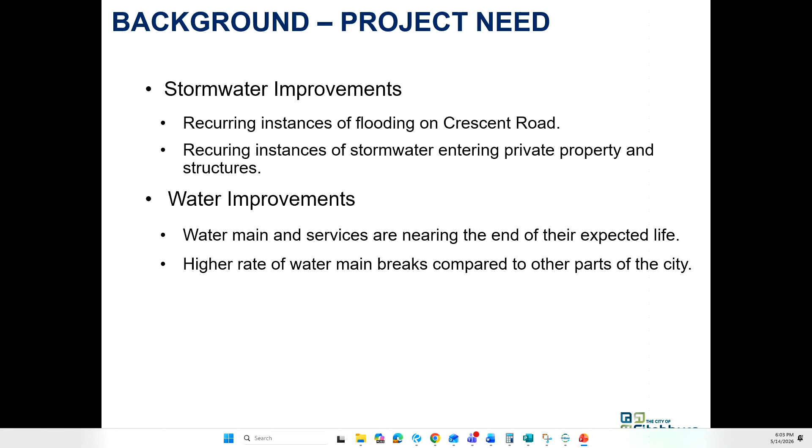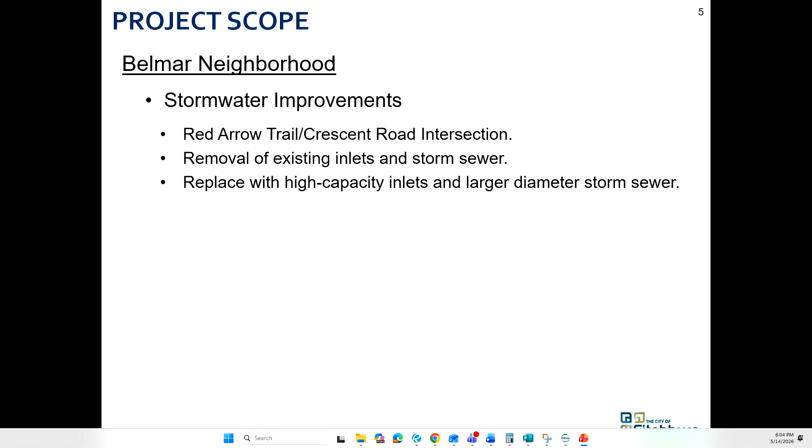Okay, so jumping into the scope again. With the stormwater improvements specifically, this is going to be at the Red Arrow Trail and Crescent Road intersection. They're essentially just going to be removing some existing inlets and storm sewer, and then putting in bigger inlets and bigger storm sewer. It's really pretty much as simple as that -- increasing the capacity and how much water the infrastructure can take. And then here's just a little map.

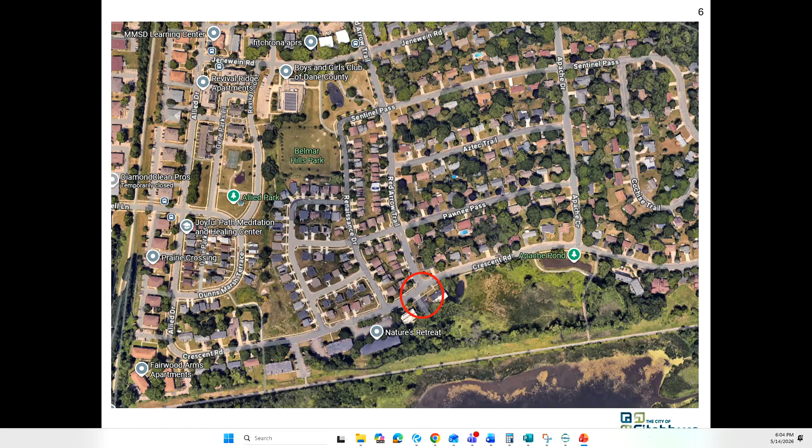I don't know if everyone can see that red circle on there -- that's basically the project area for the storm sewer portion, so it's largely contained in that Red Arrow Crescent Road intersection. And then here's just a snip of one of the plan sheets. We can talk about this a little bit more in detail if people are interested, but this is basically showing the new pipes that are going in -- again, larger pipes, larger inlets, can handle more water.

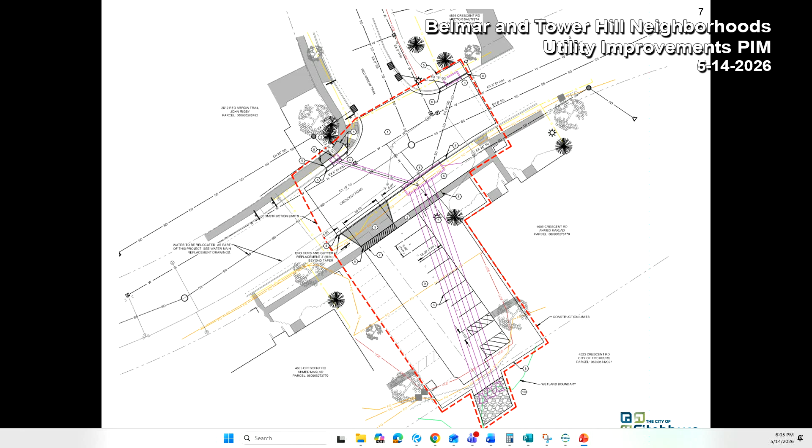So now we'll move on to the water main and water service replacements in the Belmar neighborhood. Do we have any Belmar neighborhood residents? Sentinel Pass? Or are we all Tower Hill here? All Tower Hill, all right.

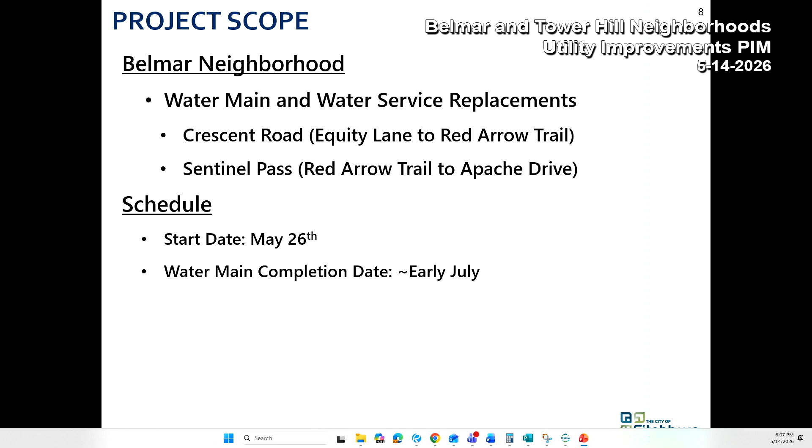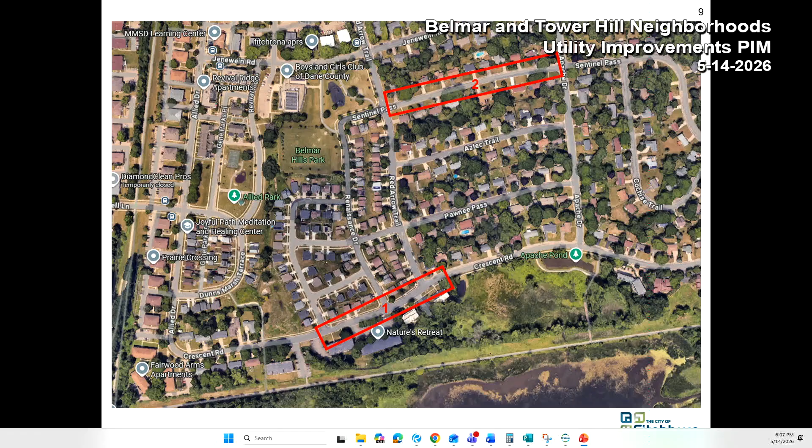So of course they're going to have to dig up the terrace area between the sidewalk and curb and gutter to install the service, so they'll have to restore grass there. Some folks might have a water service that goes under their driveway - if that's the case, then part of the driveway has to get removed and replaced. We'll talk more about that too in resident impacts.

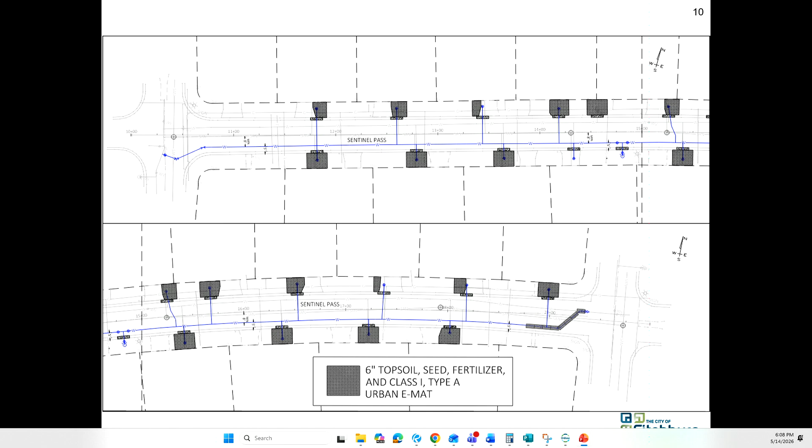And I'll just kind of flip through these, but does everyone kind of get the idea of what the water main portion is? Basically, just putting in the new one and new services.

We can move on to Tower Hill now. Same deal as what we just talked about at Crescent Road and Sentinel Pass - it's the exact same project, putting in new water main, new water services.

So as far as the schedule here, basically once they wrap up the work on Sentinel and Crescent in that kind of area of Fitchburg, they'll start to come down into the Tower Hill neighborhood shortly after. So we're looking at a late June start date for this area right now. It could start earlier if different crews become available.

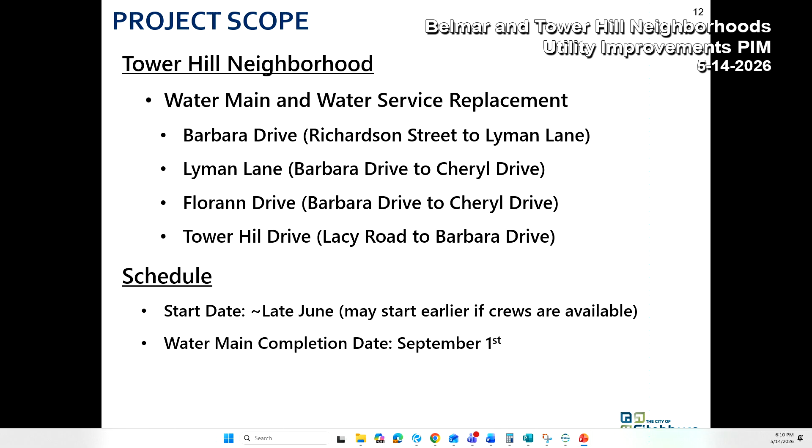And again, here's just the kind of red boxes around the streets that are getting the new water main and water services. So as I said before - Barbara, Florann, Lyman, and Tower Hill here.

On this map, you'll see numbers, and right now the contractor's intention is to install it based on those numbers. So where you see 3, that's where they plan to start first in the Tower Hill neighborhood, then go to 4, 5, then 6.

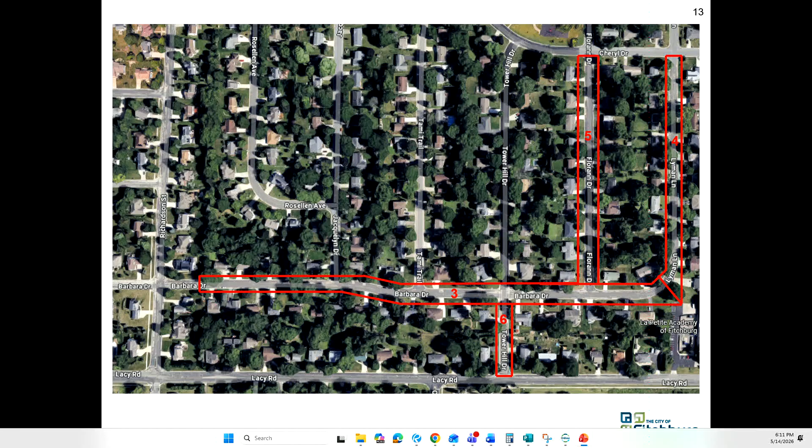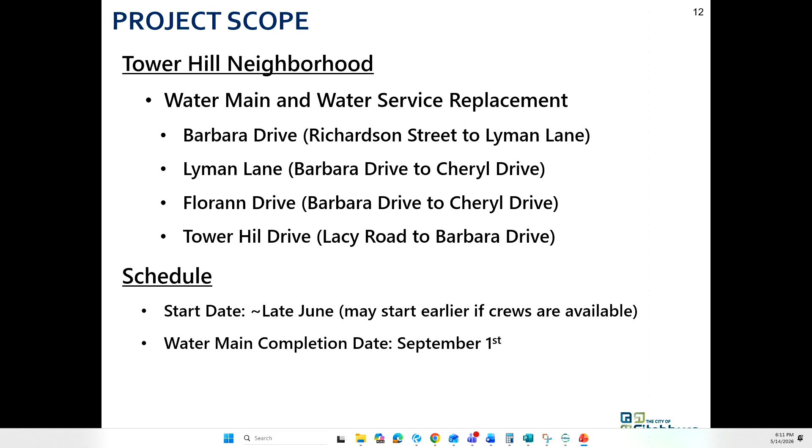Right, and I think it is in the same order. So yeah, what they're thinking now is starting on Barbara, then Lyman, then Florann, and then Tower Hill. That is subject to change to some degree, but that's the plan as it is right now. You know which way on Barbara, or is it all at once? No, based on the plans, because he said he was going to go through the plans from beginning to end, it's the west end, but that too could change. But it most likely will be the west end because we're going to go east on Barbara, and then it ties in, it just keeps going down Lyman. So that's what I would anticipate.

You start by near Richardson. Yes. And then just one thing to point out is we aren't going all the way to Richardson. We're starting about 200-300 feet east of Richardson Street, where the older main was installed. There's a hydrant there by a wall, right where the first house on Barbara is. Okay, thank you, Tracy.

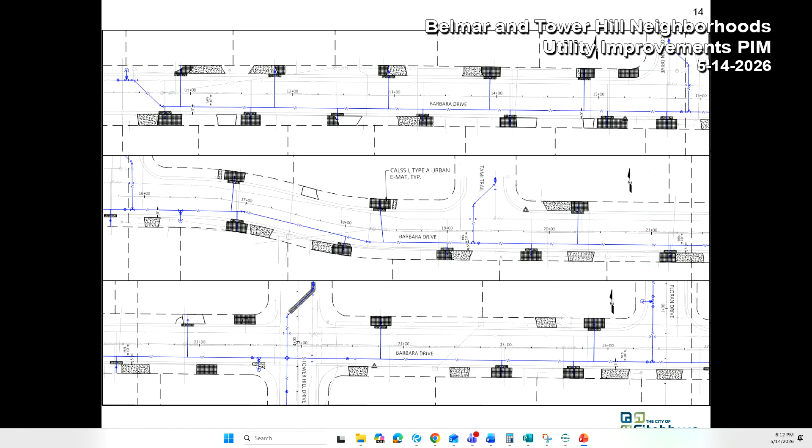And again, just kind of like what I showed for the other area, here's just the schematic where it shows all the water main, some of the disturbance in the terrace as far as the area that needs to be restored with grass, or a driveway replaced, or a driveway apron replaced, I should say.

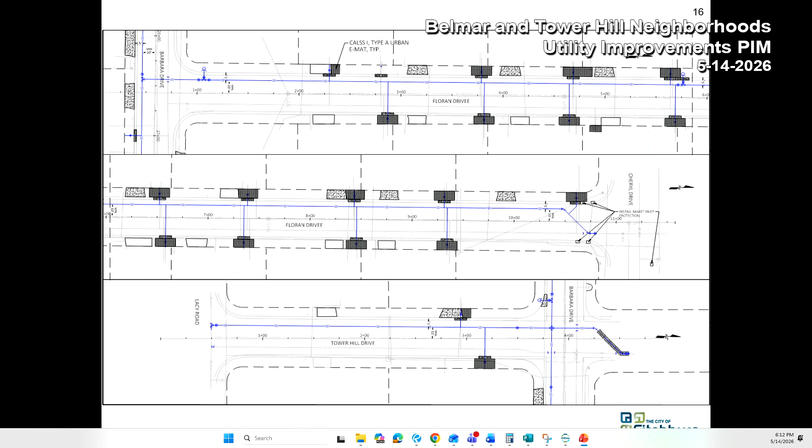Yeah, and we'll be here for a little while. Happy to answer any specific questions once we get a chance to kind of look at the plans.

But I think this is going to be some of the important messages that I hope everyone will take home, just the idea of what to expect during construction and what impacts you will see. So of course, roads are going to be closed to through traffic. You will be able to get down your road, it will be open to people that live on that street. You will have driveway access generally throughout the project.

Like I said, there are some homes that do have their water service under their driveway apron. When that is the case, the driveway apron will have to be removed and replaced. It will be replaced to match existing, same geometry, same material, whether it's concrete or asphalt, matched in kind. And if that is you, the contractor is required to provide a 48-hour notice prior to any kind of driveway restrictions. And at the end of the day, unless it's concrete that needs to cure before it can be driven on, you'll have access at the end of each working day.

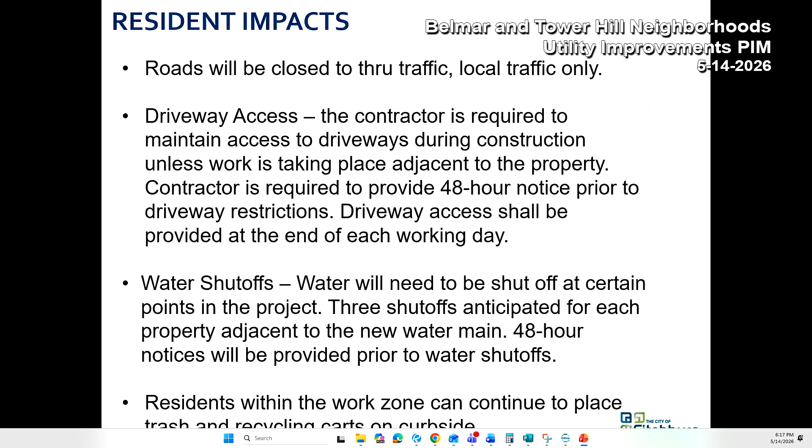So trash collection, recycling collection, that's another big thing. You should just be able to continue to place your trash and recycling bins as you normally do. Pellitteri is aware of this project, and the contractor has a lot of experience working on these kinds of reconstruction projects, where they'll move your garbage cart or recycling cart to where it needs to be to get collected. So if there are any issues with garbage collection, please let me know.

That's a great question. The question was about mail delivery. Mail delivery should still occur as normal. Again, if you have any issues and aren't able to get an answer from the Postal Service, you can let us know. But they'll also be made aware of this project and that there will be construction going on here. If they need to move your mailbox to accommodate construction, they'll be putting in temporary mailboxes. Every once in a while there's a service close to a mailbox where we'll have to put something temporary in, and then they'll restore it. Once they're done with the work, they'll put your mailbox back in.

It did seem that last year during Richardson Street, the mail delivery person was unhappy about how it was handled. Yeah, I'll have to ask about that. The question was just some issues with mail delivery on Richardson Street during last year's project. So I'll follow up on that and see if there's anything we could do to help them out.

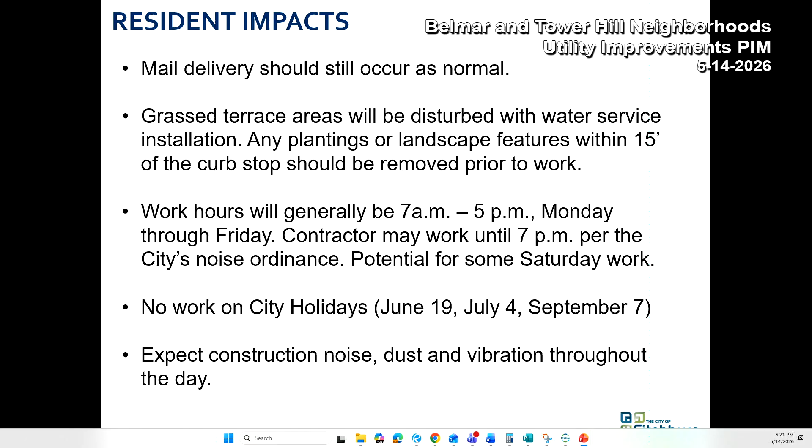As far as working hours, it's generally going to be 7 a.m. to 5 p.m., Monday through Friday. The contractor can work till 7, that's what the city's noise ordinance allows. They haven't indicated that they would be doing that, but they may if they get behind with weather. And same goes for Saturdays. They haven't indicated that they're working Saturdays, but if things get behind a little bit, Saturday work may occur. There won't be any work on city holidays, so that's June 19th, July 4th - actually I think July 4th is a Saturday, so it would be July 3rd, the federal holiday - and then Labor Day, September 7th.

Other things, just general construction - it's going to be noisy, it might be dusty. We did talk to them about, if it's overly dusty, they can spray a little water down to help with that. And then just that construction vibration with their big machines. Unfortunately, there's no way around that. It is going to be a little loud, dusty, and not quite as peaceful as maybe you're used to.

All right, so we'll get a little bit more detailed into the schedule here. Anticipated start date is May 26th, the Tuesday after Memorial Day. Just to reiterate, they'll be working in the Belmar neighborhood first, so that's your Crescent Road and Sentinel Pass. They're going to be looking to get the water main work done first.

And then they'll follow up with the storm sewer work in this neighborhood. Utility work is anticipated to be complete by early July, weather pending and if everything goes okay. Then the streets will actually be repaved as part of a separate contract. The city has an annual street resurfacing contract, and that'll be a different contractor that comes in and repaves the streets following the utility work.

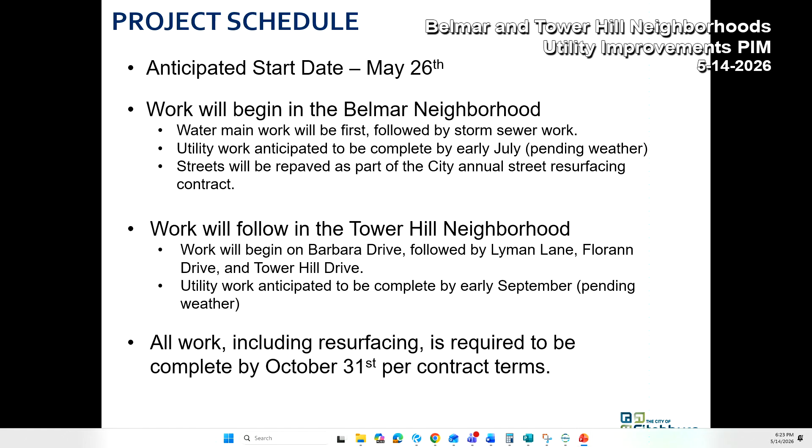In the Tower Hill neighborhood, they'll be beginning on Barbara Drive, then go down to Lyman, Florann, and Tower Hill. Looking to start that late June, early July. We'll update you when we have exact dates so you can get ready for it. That work is anticipated to be complete by early September, weather pending. All work, including the street resurfacing, is required to be complete by October 31st, per the terms of the contract with the paving contractor.

Anything else to add on schedule? No? Okay.